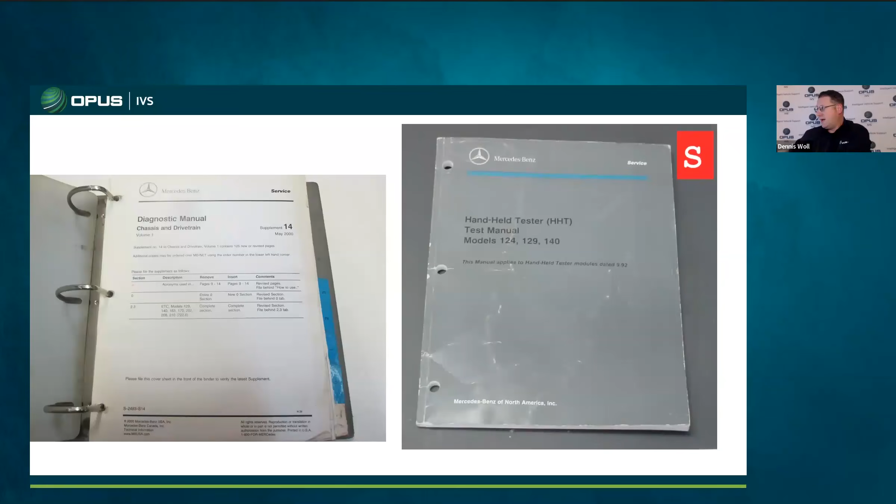When you're using that impulse counter, this is basically what you were going to reference. Having these diagnostic manuals was really, really invaluable. This is what they look like. They typically live with the oldest guy in the shop, but when you're working on this older stuff, it's really good to have. Having the book is going to have more than anything.

But if you don't have them and you can't get a hold of them, once you log on to Mercedes-Benz's ISP portal - and we'll get to that in a minute - you can go through diagnostic info and hit another tab that says launch manual. Here you can see we have a 124, 129, all these chassis numbers here. This was really invaluable to use with that impulse counter.

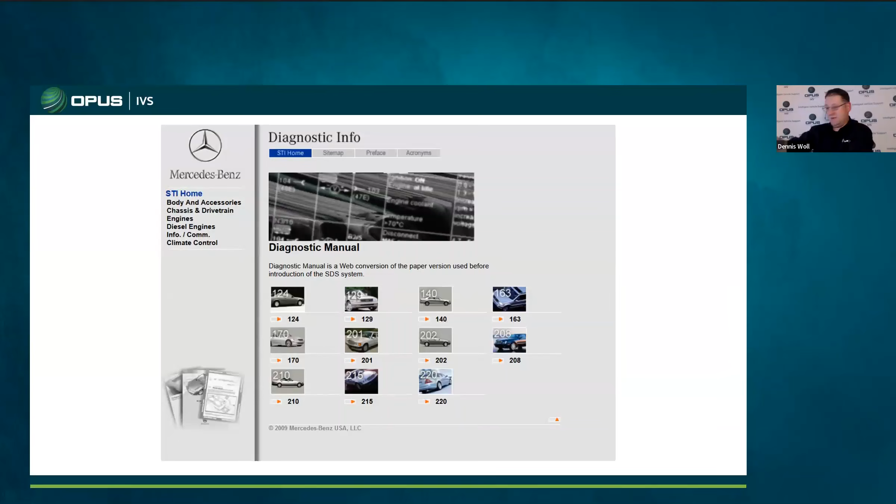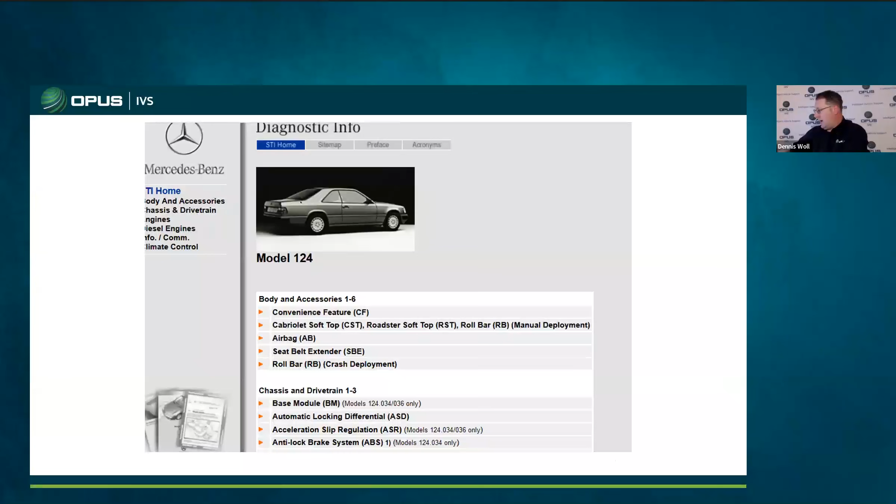So you would click on there, and either using the blink code, that impulse counter, or the handheld tester, HHT, you would be able to get here, choose the vehicle, and as we step through - in this case it looks like we're on a 124 here after we've selected our chassis - we can start to see these different groups show up.

Over here we see engine, for example. We have some basic testing and troubleshooting information. As we go through here, if you follow it down a little bit on the top left, it even tells you like engine control module, socket 8, EA/CC/ISC is socket 14. So it's telling you where those pins are that you can plug that guy into, to be able to use your impulse counter. If you're working on these older cars, it's invaluable information and it's pretty decent quality.

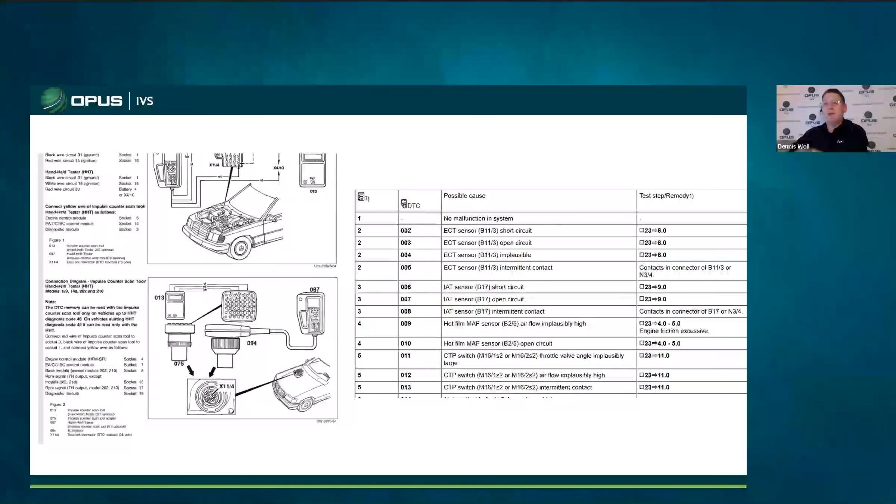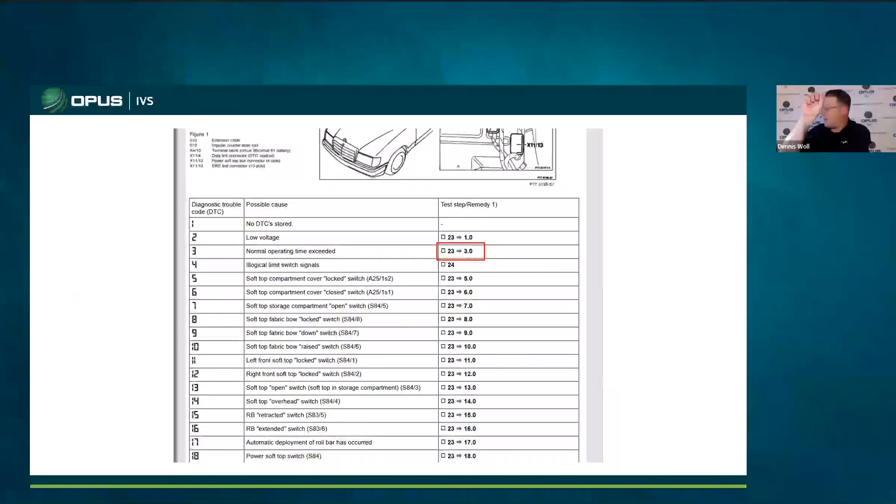The paper manual, the books, will always win, but it's way better than having nothing. Let's say we went over here and picked code number 3 on our diagnostic trouble code - it would take us to page 23, step 3. So you would click on that little 23 and the double line with the arrow, and it would take you to that 3.0 step. Here you can see in the top left corner you're on 3.0, and that's going to give us some results - erase your DTCs, check the wiring, possible control module, whatever the result may be - or go to the next step to get to the next fault test path.

So again, with the impulse counter, you need the paper manual or diagnostic manuals to be able to see what you got, because it's just a number. Now you're getting a fault description. So we're talking about cutting edge technology back in the day, right?

Andrew, on some of these older cars, how are those modules installed? Face down. Face down, gotta love it. So all the pins are on the bottom. I don't have socket boxes, so I'm going to start pulling it apart and back probing, and it's just an absolute mess when you get to some of these things. You can work ahead of it, but on some of these cars, depending on how involved you're getting - especially like a V12 where it's 3 separate harnesses.

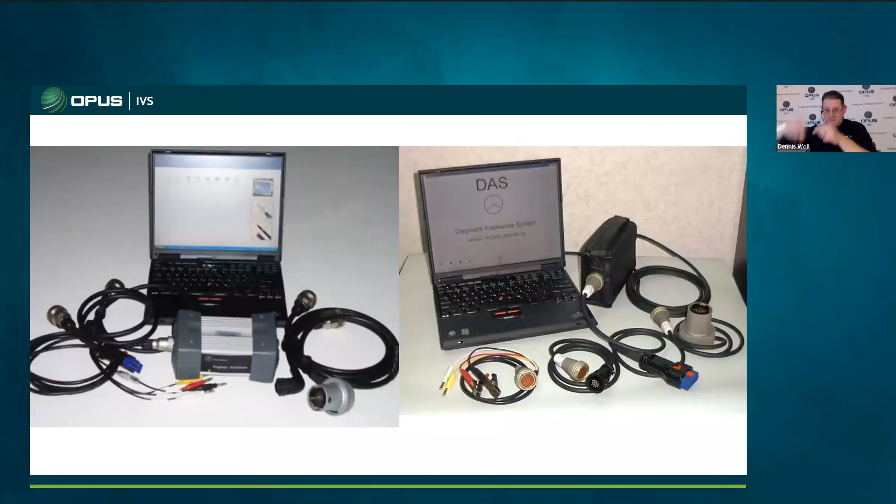So if you're looking, we've got just a small tool. We've got 38 pins, we've got just a little individual plugs. So Mercedes-Benz was pretty decent about being able to go ahead and go backwards. Now there's been various versions of the tool. And again, the multiplexer that we're looking at here, I mean, we're talking, it got bigger before it got smaller.

Andrew, where can I put this thing? I see it's got a strap on it. Can I just hang that on the side view mirror?

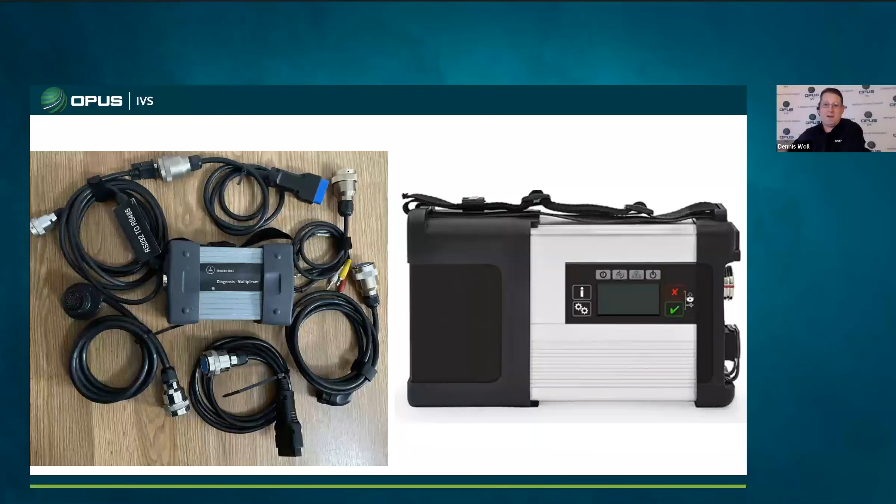Don't recommend it. So you could, but if somebody was backing out of the garage and they nicked it and the side view is a little loose, if that thing dropped, that ruins your day, because on these older ones, everything was in the multiplexer. So if it drops, you're up a creek without a paddle. I recommend just throw that guy on the seat or on the floor and just run the cable through.

If we're looking at our, again, this is part of that backwards capability that we're talking about. So this is using the SDS, and we're on an older car, and we're launching our HHT, or in this case, HHT for Win, right? Yeah. If we get in here, we look out in the center, that's how we're going to enter. And then again, we're going to look at that F1, F2 buttonology, and we'll get into that later on too, as we go through the presentation.

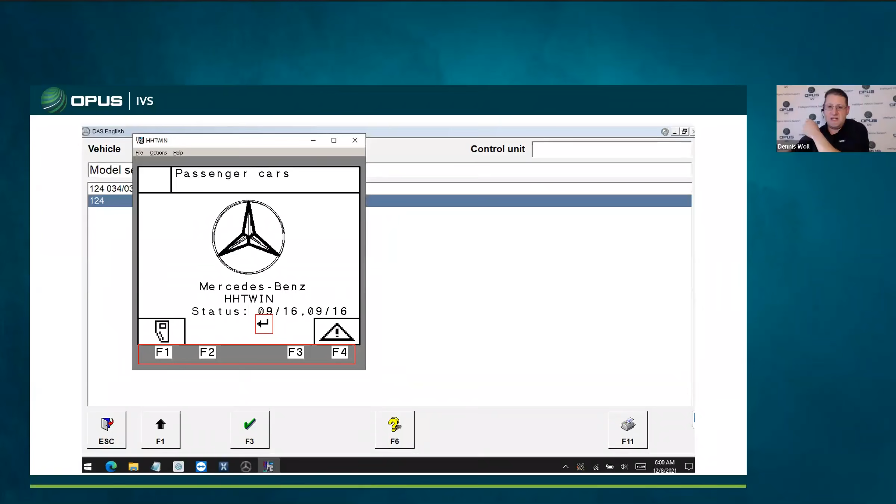Over here, here's an example of what a DAS screen looks like. Looks like we're on a 124 chassis. Quick test, they refer to it. Not exactly a quick test. Even with the factory tool, it can take some time.

So again, as you see that's highlighted in blue on the bottom of the page here in diagnostic info, that's what we talk to as far as our launch manual. Another thing that we see here is under our diagnostic info is OBD DTCs. So again, just another good source of information.

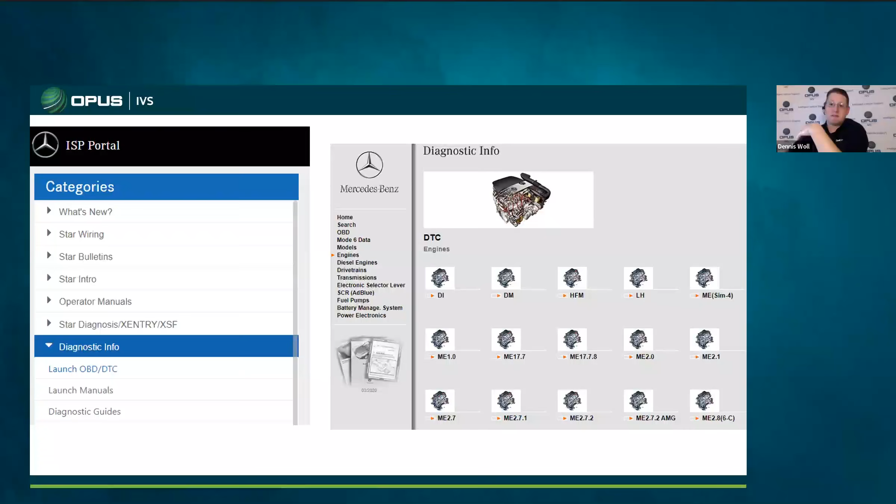If we go through here, again, this is using our diagnostic info under our ISP portal, or independent service provider portal. We'll get to that. As we go here to type in our code.

So if we're using our Impulse or HHT and we started wanting to go through and learn how to test it, right? Before that integration, you're so used to going through the manual or searching through on the computer. Once the ThinkPad came out and DAS was introduced, a lot of those tests were on the tool. But again, still a really good source of information.

If you look at the top right there, it looks like we're searching for a code 1200. You can also type in just a word search. So if you type in boost, a bunch of stuff with boost is going to come up.

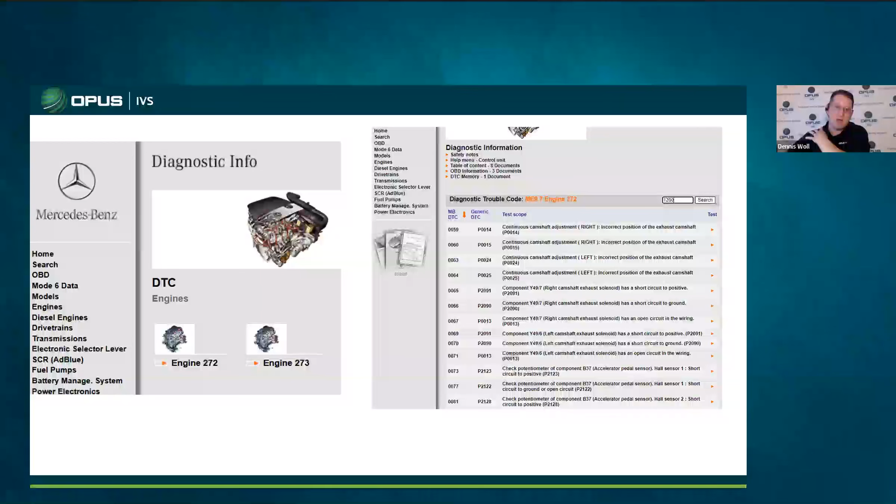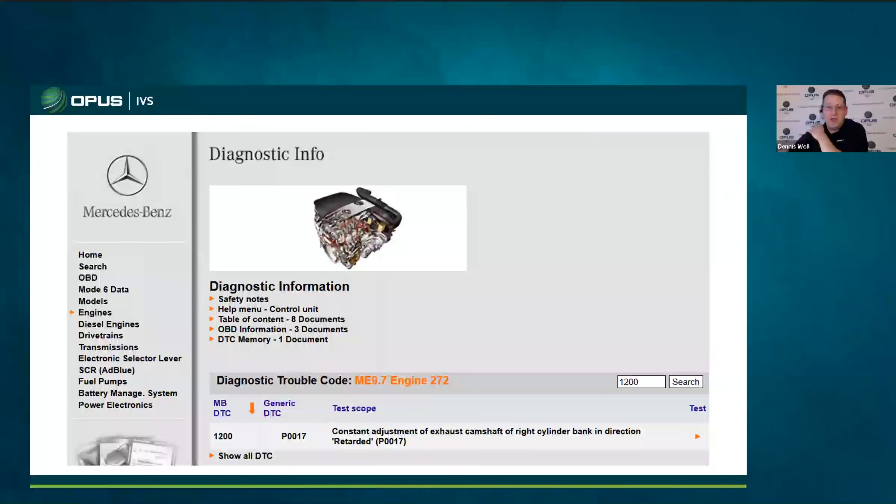Over here, it looks like we're on an ME9.7, or Motor Electronics 9.7. We're searching for that 1200 code. And it looks like we have our Mercedes-Benz diagnostic trouble code and the generic code. And now we have our description. If you click on it and keep clicking that orange arrow, it's going to go to the next step.

So most times you're going to have useful information here. It may even have some test steps for you. As time went on, this is what you saw.

Okay, so you'd get communication with the ECU, or electronic control unit, is required. So when it dead ends here, this is where Mercedes-Benz was really shifting a lot of their diagnostic advice into the tool. Okay, and even for emissions,

They've argued a long time that if you have our tool, you have the answer. I would say, for the most part, they're not wrong. It is a very comprehensive tool, and it does have a lot of good test steps in it and information as well.

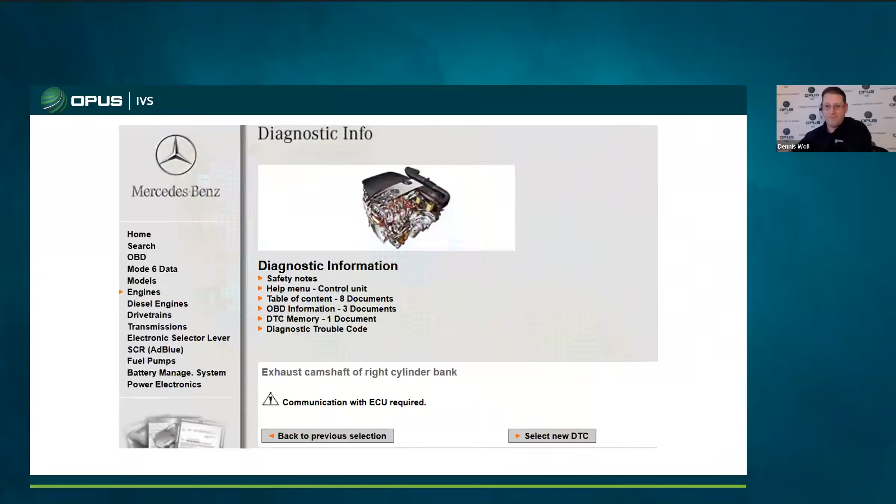When you get your tool, there will be a sticker on the box, and there's going to be a sticker on the back of the tool. Make sure that they match before you do anything with it. So once you get it, you want to make sure that everything's there. So if you do inquire a problem, everything matches up and you're not starting off way behind.

To be honest with you, I don't care where it is, whether it's in the multiplexer or in the tool, as long as it works. But this is typically what you're looking at. It seems to work pretty good. Don't have a lot of issues with it.

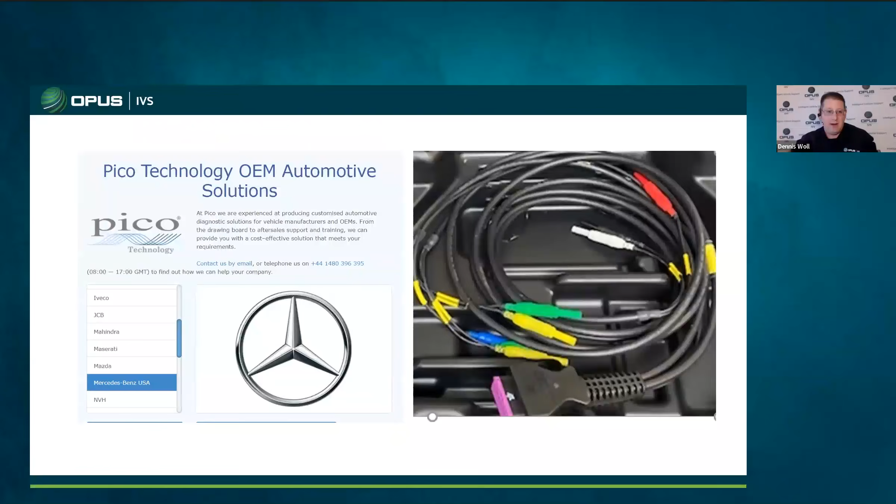So again, it's going to have your settings set up and ready to go. I typically find that they work, but always check them. Once in a while I do get a little thrown by whether it's got AC coupling on or not, and maybe it shouldn't. So always check that stuff if your pattern just doesn't look like it's supposed to.

There is also a pretty extensive library on there, and again, just very user friendly to use as far as using a scope.

We can't really get into the CAN tool for the whole day, but it's a great tool to use. Again, this is for when you have a good scope pattern. We're dealing with good CAN voltage, but we're more interested in the message. Again, it's highly advanced. If you ever have any downtime, it's a great tool.

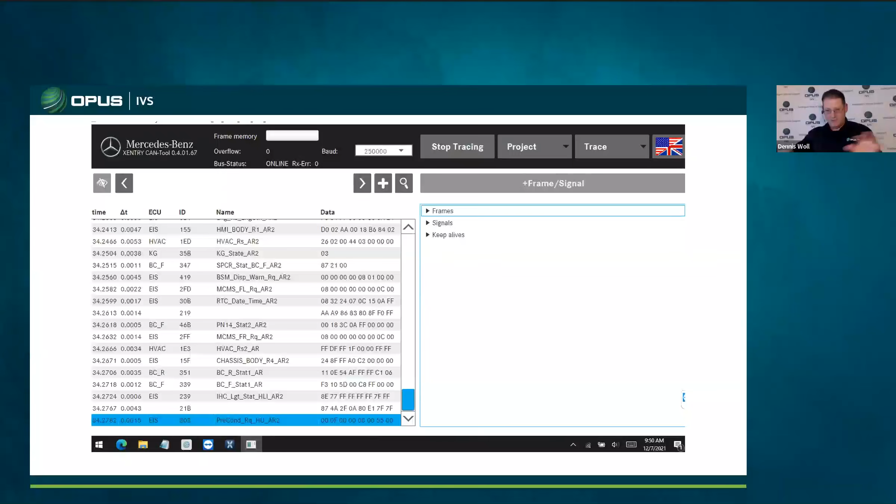Funny story - I was working on a car with my power supply on the jump post. I didn't know it, but somebody had messed around with the pre-fuse, and it basically blew and separated from the battery, though they kind of jumped it weird. My leads for my CAN tool were on the battery, which was stone dead. So it took me a little bit to find it. I thought I had good power and ground, turned out I didn't. So always go back to the basics when stuff doesn't work.

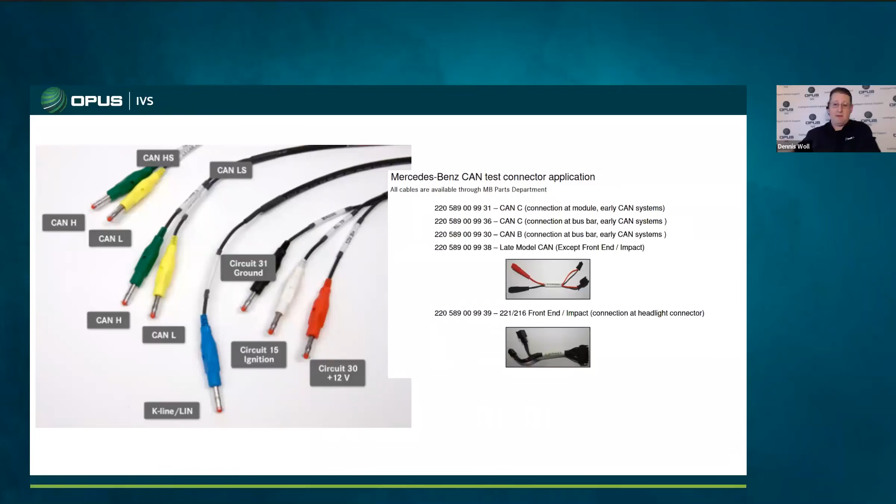Quick PSA here - if you have a cloned tool, or a knockoff, whatever you want to call it, make sure that when you order your $40,000 tool, you have your clone permanently air gapped. Because if I'm using my legit tool and I have my clone tool on the same network, guess which tool they're going to shut off? The $40,000 tool - now it's a brick. So if anybody's using clones or bringing them in, just make sure they are permanently air gapped. I don't want to play around with it. I hear horror stories about mobile guys getting to places with no idea there was a clone tool there, and it turns into quite a mess. So again, if there's a clone tool, leave it at home - you've got the real deal there, there's almost no need for it. And if it does need to be there, just make sure it's not hooked up to the internet. Xentry does phone home.

Now Xentry is important, and we're gonna get back to it in a little bit, but it's only one key part of a multi-pronged solution you need to perform these diagnostics. You need ISP and schematics and star wiring. Description and observation is going to be in WIS and our parts catalog.

So we're going to spend a little bit of time on our ISP, our independent service provider portal - that's going to be you, me, anybody who's not the dealer. When you get to log in, these are great resources for this multi-pronged approach. You're going to be given a C7 number from Mercedes-Benz. At the dealer, you were given a D7 number, so customer versus dealer. For me it would be C7D Woll or D7D Woll, and your password - make sure nobody else has got a hold of it.

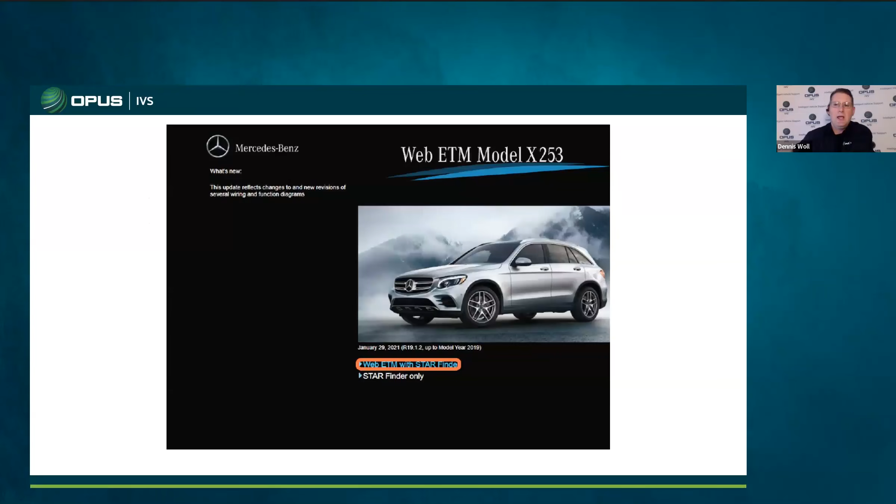If you just need locations only, you could do that, but you would hit Star Finder, below that highlighted orange there. But typically when you're using this, you want Star Finder with WebETM—that's what you'll be using.

A little box will come up. You might also see this when you're working on 48 volt or hybrid and things like that. You're just going to say that you've read it—hopefully you have—any safety information that is.

Once you've gone through there, you can choose to search by diagrams, by the title, by the components, by the name, or you can start searching through the number if you know the alphanumeric number. In this case, we're hitting N73 for our electronic ignition switch. Then just click on that document highlighted in orange, and it will take you to the schematic.

Right, so that's going to mean a few things. Typically, the most common is that you don't have access to it because it needs to be re-upped—it may require payment, or you may have a technical issue. Typically technical issues show you errors.

If it doesn't come up with that little pink error and it's just grayed out, you can go look at your subscription. I usually just take a screenshot of it and say, hey guys, I'm paid up, please turn this back on for me. I should say please, understand—as much as I'm saying I need it done yesterday, everything with Mercedes-Benz is hurry up and wait. So use sugar as much as you can when you're emailing these guys.

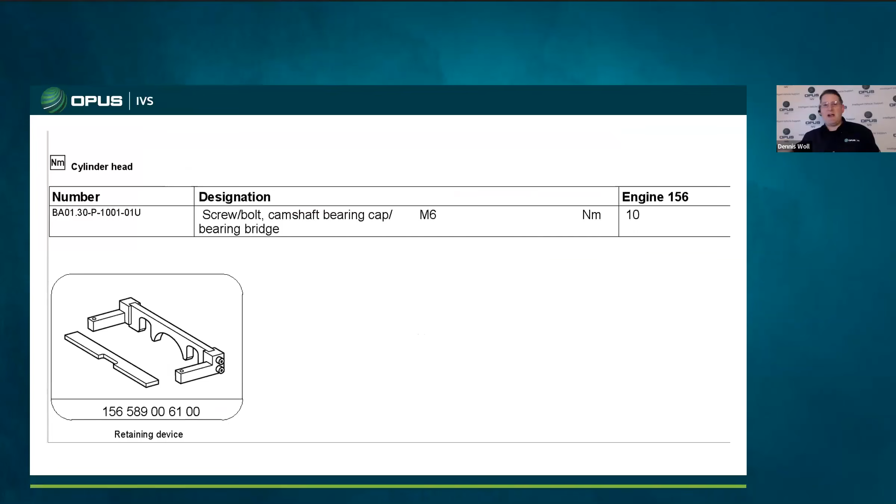And what do the blues do? Blues are generally specifications, fluid types, torque specs, that kind of thing. Special tools too. So in this case, we hit the blue and it's going to take us over here. So red's going to be your how-tos, blues are going to be all your specs and special tools and things of that nature.

I touched on the diagrams. Many other diagrams that are in your ISP portal under Star Wiring can be found in WIS. Mercedes-Benz states that the diagrams in WIS are more accurate, and I will say they are when available, usually with additional details too. These really work well on some of that older stuff, like a 903 chassis - definitely way more accurate than using Star Wiring. I definitely recommend using WIS for those older 903s.

If we're over here, you'd have to open up a document for the schematic - click on that PE document, then click the link to see it. So we're going to go ahead and click on our wiring diagram, go all the way to the right to our little eyeball and click it. After that, it's going to take us there. The first one on that top link, if we go over to our left, that's our wiring diagram for MESFI. If we click our guy on the right, it's going to take us right to the schematic.

Once you look at it over here, it's a little different than Star Wiring - you can drag it and move it, but it's not just going to be all over the screen like Star Wiring was. Fundamentally the same content or more. You can also change your color - the background color is in that top little 3 dots for the toolbar, and you can change the background color as well as show the flow of electricity. The other thing is that when you click on these, in this case if you click on a certain Z-splice, it takes you to that Z-splice and every Z-splice in the car - a nice little layout to see where things are in the vehicle.

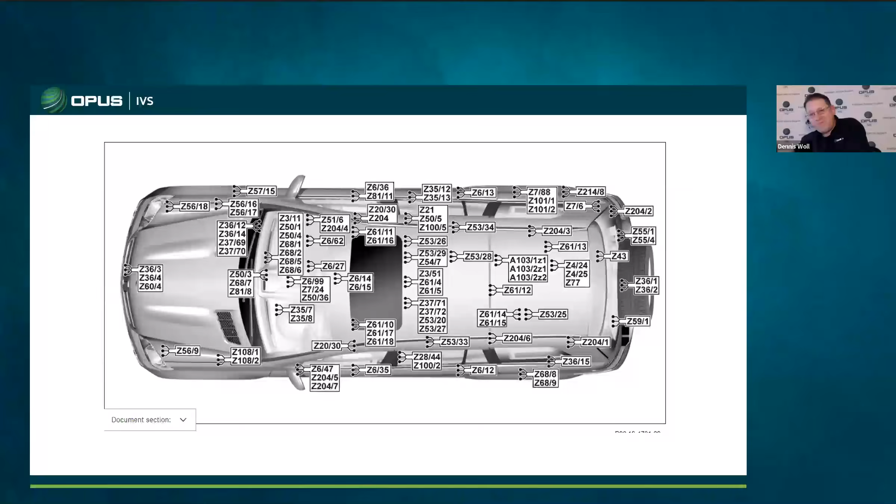You can choose the latest tips documents for what's there. You can get to the most popular tips documents, last read tips documents, and your favorites. Or again, we usually try to keep it as all to get as much as we can on that particular topic.

Now, the other cool thing is the same applies to WIS documents - you can just breeze over it, hover over it with the mouse, and it's going to move to give you a quick idea of what's there. Same thing with symptoms.

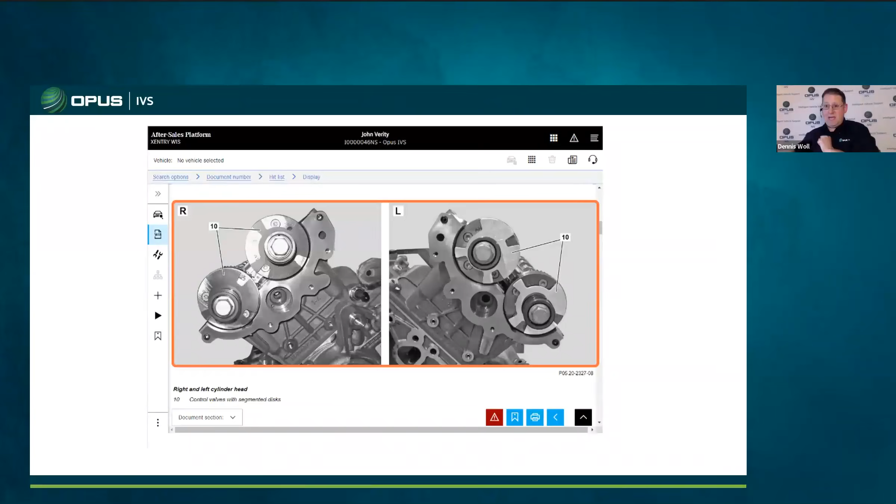You can also type it in the top left word search—you can put words in there, whatever you want.

Now that I've said all of that, if you're using tips, using the VIN is great because you're specifying it to your vehicle. Is that best practice, Andrew? Most of the time, most of the time—it'll be sufficient, but...

In some cases you might want to broaden your search by searching by the chassis only. If you search just by the chassis and the car you've got, Mercedes-Benz sometimes leave out information that is applicable to what you've got.

A good example would be oxygen sensors on an ME97—very common. I think the tips document or the LI topic says the lines are mixed; it's not that they're mixed, they're shorting out. And ME97 isn't just in one chassis—if you pull it up on a 164, you can search the topic and it's there, but if you search it on a C-Class, on a 204, it doesn't come up, even though it's the same engine and they suffer the same thing. So that's a way it'll kind of spill over to the next type of chassis.

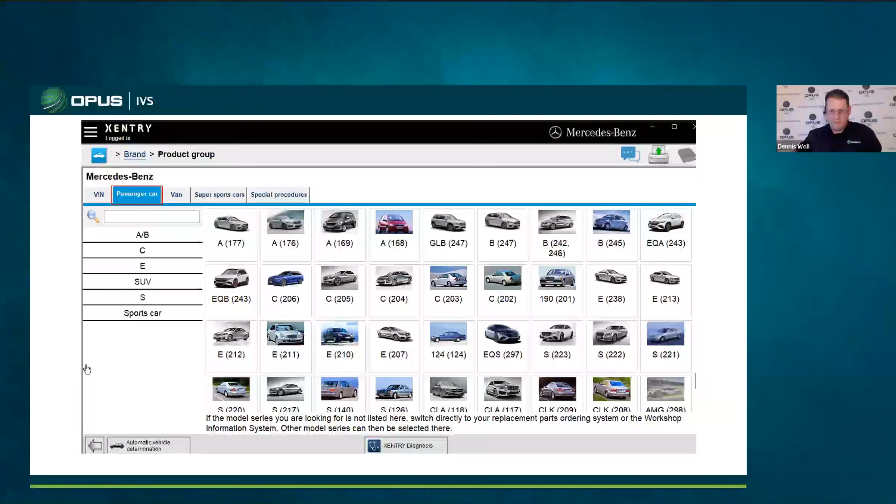So if the automatic detection is not there, passenger cars are good tools. This was a GLC I was working on. I selected all, kept hitting all, went ahead and on the bottom selected Xentry Diagnostics.

After that, it's going to go through a 6-step verification. That gray bar is going to play ping pong and go back and forth and run through all of our 6 steps.

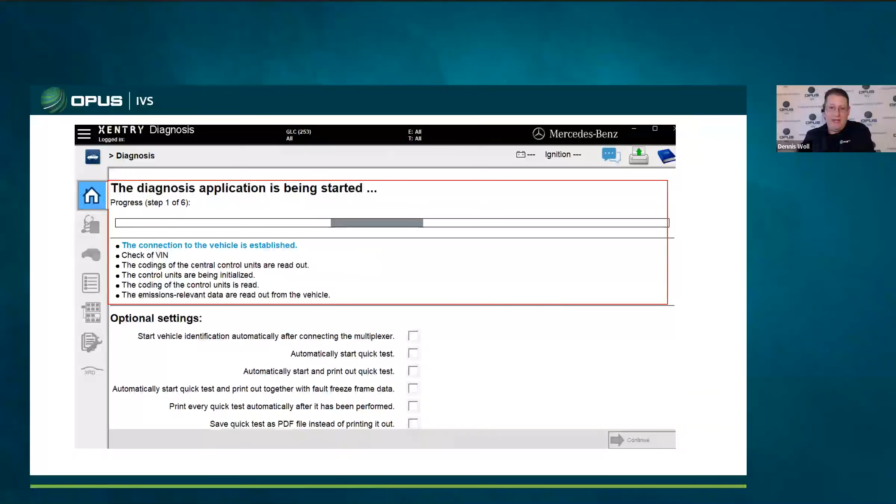If you hit customer complaints, it'll ask you to first run a quick test. We have overview, diagnosis, customer complaints, control unit view, topology, special functions, Xentry remote diagnosis - that's pretty much for dealers at this time.

We're going to start with a quick test and then work our way through. So we'll go ahead and hit quick test, initial quick test in this case, since we haven't hit one yet. After that, you'd hit start at the bottom left, and you're going to see a little progress bar come up again. Sometimes it's going to hang up - if this hangs up, just tap the screen and it'll start to go.

The control units are going to be in a fixed sequence, and they're usually in an order of function groups, right? Powertrain to body in alphabetical order. Now, the control units are going to be sorted into the status from current codes.

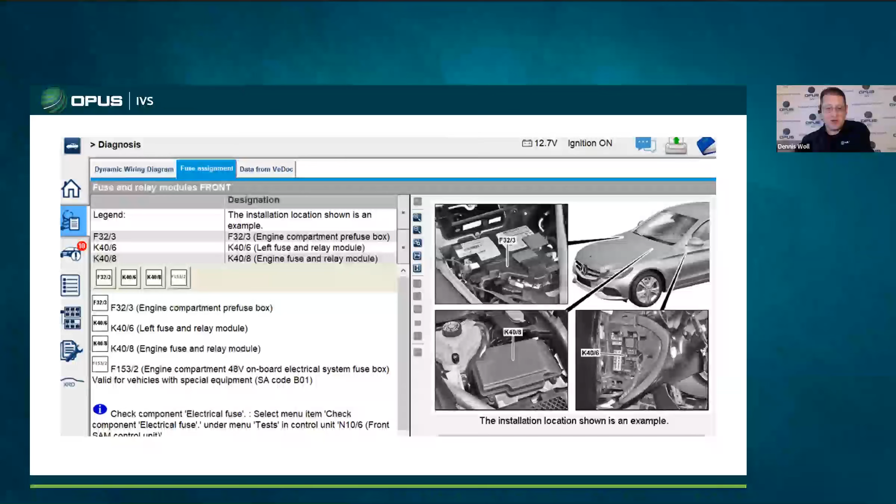And again, I'm right at the tool. I haven't left the car. And then here's my fuse and relay layout, which is also super nice because depending on data card and stuff like that, it may not be there.

I will also tell you this can be incorrect. If you look at it and let's say it's not making any sense, always refer back to WIS. WIS is always going to be more accurate. Okay, but again, it's nice to have something that's there.

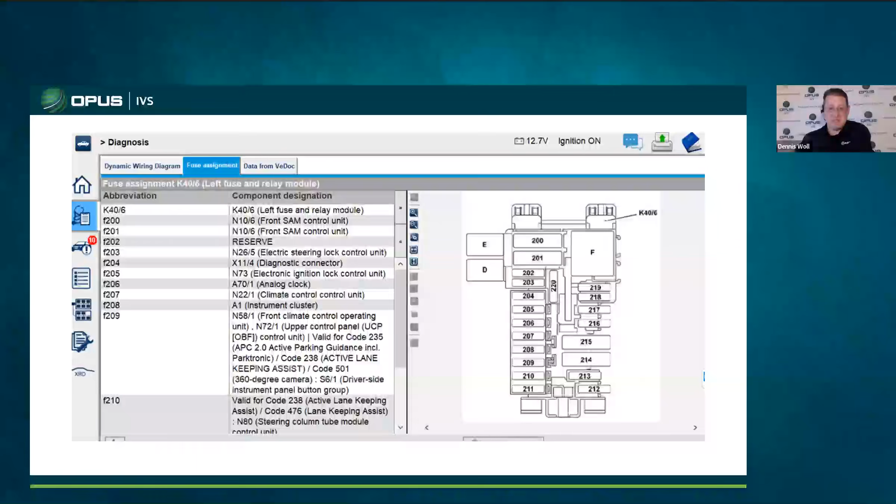We're basically just looking to make sure that it's not reading all zeros or bootloader, to indicate that the module is actually normal. And if it's in zeros or in boot, what does that indicate? It might be a new module that hasn't been programmed yet, or it could be a module where someone was trying to update it and the programming failed, and so it defaulted into the bootloader state. Or lastly, it could be that the module lost its programming just incidentally, which on rare occasions does happen. Again, just important information to know.

Next up we got actual values. You're going to see your live data there, nothing earth shattering. Next would be actuations. Usually this will give you notes as well as instructions, even prerequisites. It's almost like a prelude to a test, and they ask you for a current reading or give you a current reading or a voltage reading, things of that nature. So this is going to be your bi-directional controls.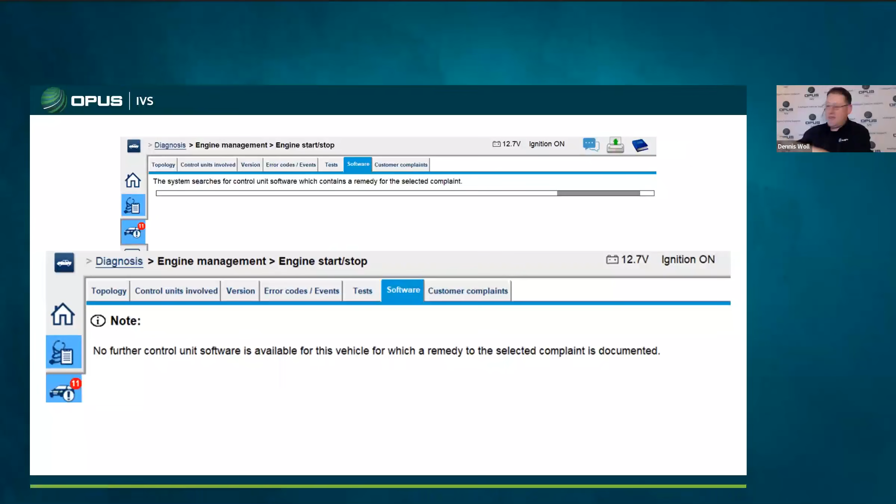Back to customer complaints, over here we can go to our control unit view. Control unit view is good if there's no module list and you want to go right into it, but it can be a little dicey. If you get into it, you better know what you're looking at and what it's equipped with, because if you don't, it can lead you down a path of 'it's not talking, it can't be determined.'

Now it's going to take you to a test, so just use caution. In this case, we looked at our all-wheel drive transfer case, and this car doesn't have one - it doesn't have a separate transfer case module. So just use caution when you're doing that.

The cross hatches in that area, what you see with the A26/17, N127, and M310, means that the control unit acts as an interface. The dark section means the control unit is in the bus system. There's an information window that pops up when you click on it. Our red markings represent any kind of fault in the system. You can also identify CAN and LIN, etc., as you go on.

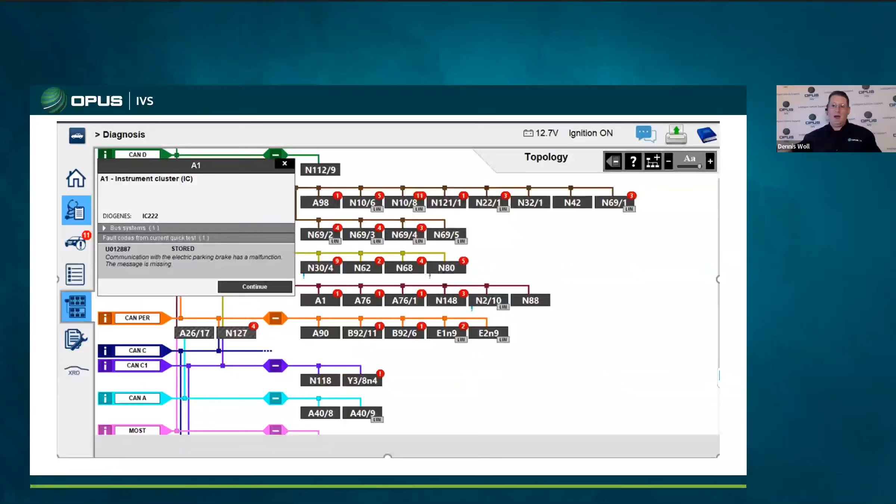You can hit continue here, and it's going to take you right to the module. In this case, it looks like we're on our transmission control module. And again, we're using topology here, and I'm going to go ahead and hit continue.

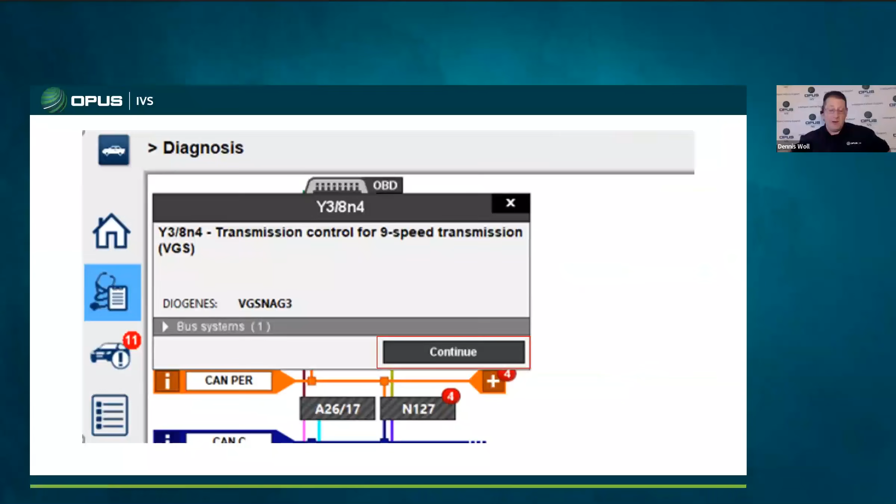Oh boy, Andrew, help. What am I looking at? What happened here? This is your typical screen that you'll see when you can't communicate to a module for some reason.

Okay, those three check marks are your friend. If you click on them, they'll give you some idea of what kind of testing you should do to determine the cause of the lack of communication.

So what I would say here is that if you see the yellow screen of death pop up, if you can toggle back and forth between the restart, just to the left of the check marks, and it's still there, it'll let you navigate back and forth. Usually means the part's not talking and the tool's okay.

If you're on the yellow screen of death and it just locks up and doesn't allow you to do anything, usually means it was a communication thing between the tool and the car, and just restarting it will get you back to it. So if I hit the three checks on it, that's going to give me some troubleshooting, right?

Yep. Okay, I'm hitting three checks. What are we looking at here? Basically the power and ground checking.

Okay, so it's taking me right to the test. Yeah, right to the test. So specifically, I've got power and ground.

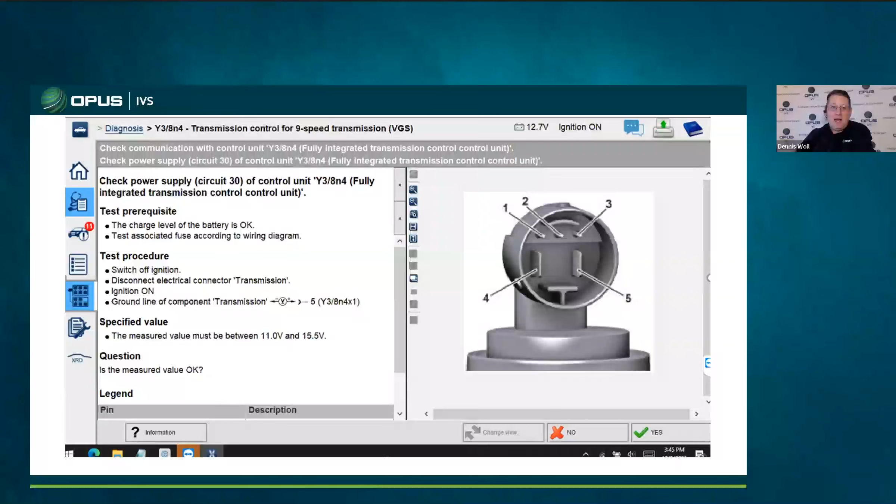Okay, so I can hit no or yes at the bottom there. It's even showing me what pins are what, which is kind of nice. It's laid out, right? Yep. Over here, if you see the screen behind this one at the bottom left, it's telling me pin 1, 2, 3, 4, 5 and what they represent. So that's great, there's a pin out.

And then we have a prerequisite that comes up. It's telling me about the prerequisite, make sure the power supply is okay, and it wants me to expose a CAN voltage distributor and make sure the wiring is good from A to B, right? Yep. So I'm going to go ahead and say everything's okay.

I'm going to hit yes. All right, I hit yes. What's it telling me to do? Chuck a control unit at it. Put it in, right? Can I put this in? No.

Why? It just, look, the tool said to put it in. The tool's got a blind spot or two, it's got a blind spot, that tool. Okay, here's the deal. It cost me $40,000, it said put the tool in, I'm going to spend $2 grand, I'm going to pop it in there, and I still can't talk to it.

Guys and girls, we still need to make sure that we're being technicians or mechanics or whatever you want to call it. Make sure it never mentions anything about terminal tension. So whether you're using the official Mercedes-Benz electrical test kit or whatever test kit you have, AES Wave makes a nice one, you want to make sure the terminal tension is good. Because if this car was at another shop and somebody was working with my first test light and jamming the thing into the pin, they widen it out and you're not going to know.

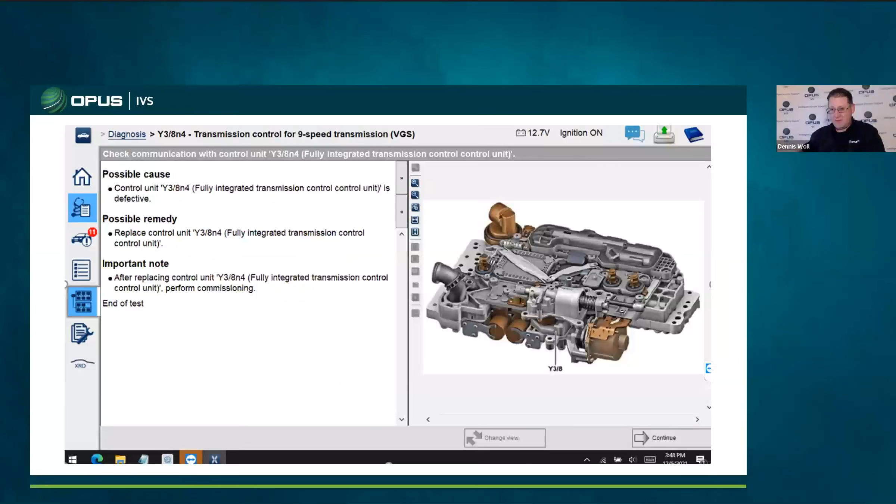And again, Mercedes-Benz in their directions, they're not mentioning it there, they just want all the lines to be okay, they don't specifically mention it. So make sure we have the right stuff. The days of paper clips are gone.

And I should mention back probing, though it's good here and there, I like wire piercers better, because if you're back probing, sometimes you can actually make the connection and you might be fixing what's there and still not be able to talk to it, okay?

Back over here, we have special functions. We can see any kind of stored logs, retrofits, Xentry remote diagnosis. All this stuff is XRD. This is all mostly for dealer, you're really not going to touch it there, okay?

If you're ever on the line with Mercedes-Benz and they tell you to hit hamburger, that's the button they mean, the three lines at the top left, okay? If you hit that and they want you to scroll through, I can tell you it will give you mostly what we've gone through, plus some more stuff.

So again, you'll have Xentry VDOC, you don't have access to that, but again, you can see TIPS and WIS and parts information right from there, and you can launch it right from the tool.

Again, just to reiterate, tips is great, but when you're using a tool, it's going to lock it into the VIN. So you might want to do that search as a general on your computer, and make sure it applies to your vehicle. Again, when using parts, make sure the VIN's in there.

Okay, over here we got our system settings coming up from our main menu.

XSF is basically there if you have a problem with the tool, it will prompt you to log in. Always accept cookies all the time. It may have you fill out a support request first.

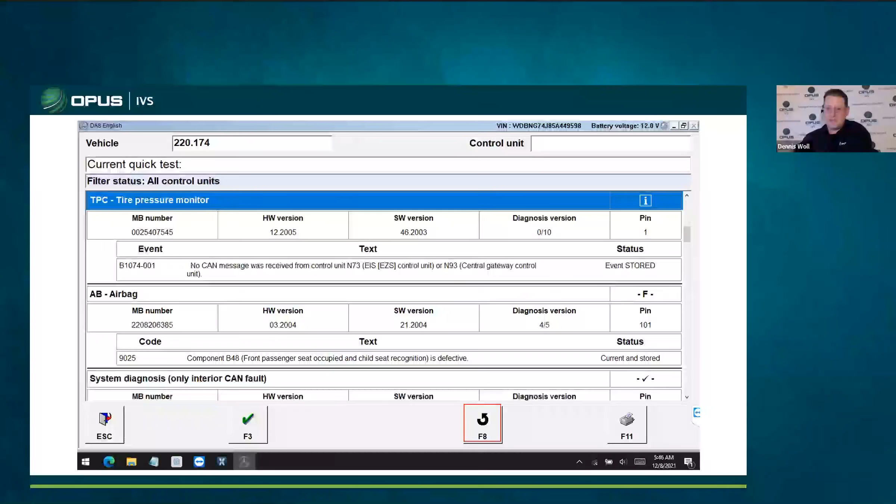You can launch WIS right from here. Again, F8 is going to be your exploded view - this was the plus and minus that you saw on the Xentry screen. And then F9, as I spoke earlier, was for clearing codes. F11, obviously a little printer there, it's going to go ahead and print it.

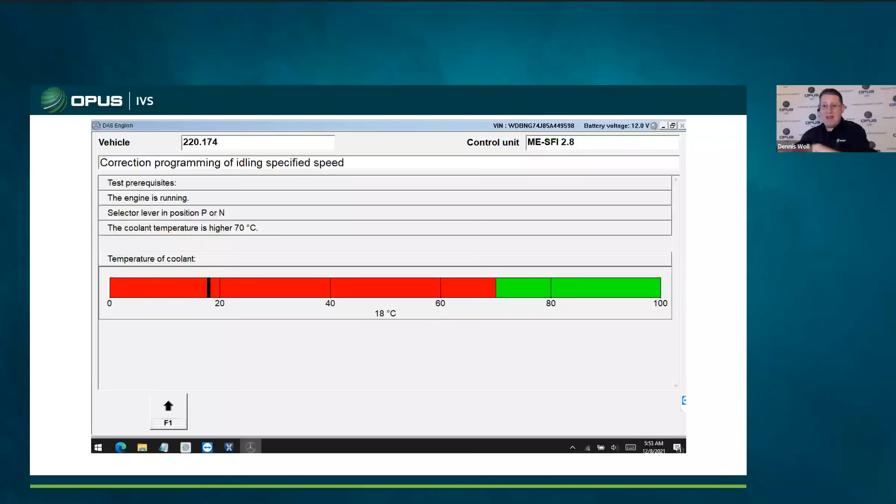In those DAS cars, and some of these Xentry, and definitely some of the older DAS cars, you could play around - there's been adaptations. If you went into variant coding, where SCN coding was starting to happen, you can actually do some stuff here. If you have an enthusiast driving a car, you can jump up the timing, enrich the mixture. If you have an older car with brand new engine mounts, brand new transmission mount, brand new seats, and it still feels like it's got some resonance, you can also raise the idle in park as well as in gear just to get that out. Again, this only helps if the car doesn't actually have a problem, but there is some stuff that you can do.

So we can go ahead and click on it and try to attempt to communicate to it. I've read all the information, hit continue, and yellow screen of death. So I can try to hit the repeat button, or I can hit my three checks. What do you want to hit, Andrew? Let's hit the three checks. Like it. So once you've done that, remembering this is a multi-pronged approach, you can have your WIS open, you can access the diagram.

You know the alphanumeric number representation of the driver's ESA is the N32/1 because you were just looking at it on your Xentry screen. You can go to the top right and start looking at the diagram to get an idea what's up. If you want, before testing, you can hit yes or no on the bottom right to get an idea of the circuit.

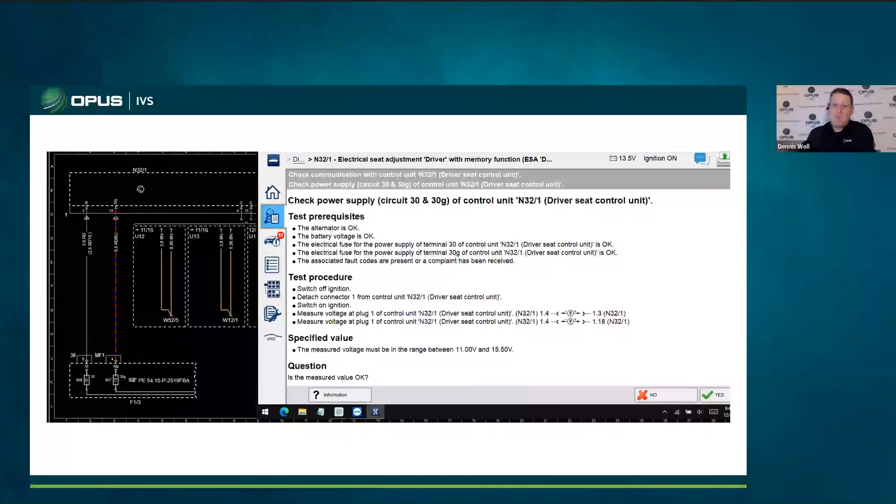Let's just say it's good. What would be next? Let's say no. What does it want next? What does it want from us, right?

So over here it looks like communicate with the CAN bus, has a malfunction, power supply, switch this off and disconnect this over here at the actual unit. And then it wants me to go to the right side of that interior CAN. So this is the left seat, but it wants me to go to the right side.

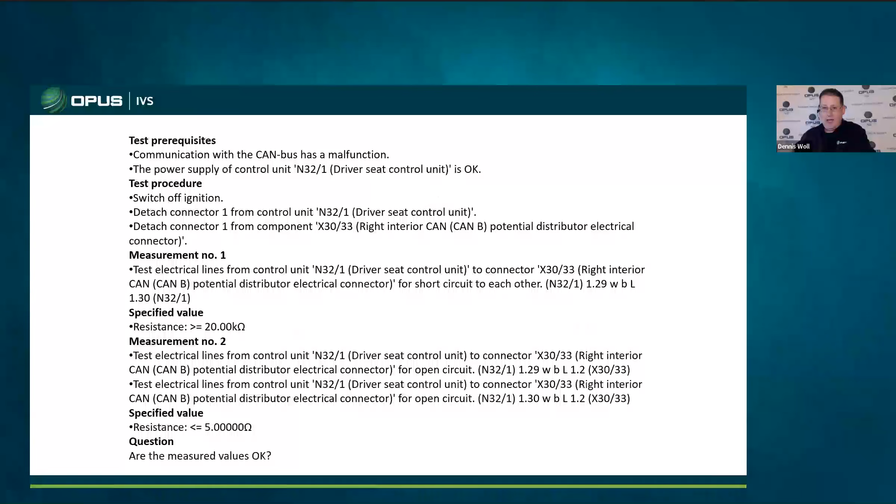All right, fine. But I ran a quick test on this thing, so I want to know what else is not talking. Let's take a look. So it looks like what else isn't talking?

Transmission and keyless go. Keyless go is not talking too. Okay, let's take a look. Is there anything that's related to them, right?

So if I work through the diagram, it's basically telling me over here the measured values are not okay, and it wants me to check a short circuit or opening CAN lines. So it's looking like I got a CAN problem, right?

So if I go to X30/33, I can see that my N69/5 is there. N69/5 is our keyless go. That was one of the guys not talking, right? Yep. Right. So if I go to my X30/33, I've unearthed that.

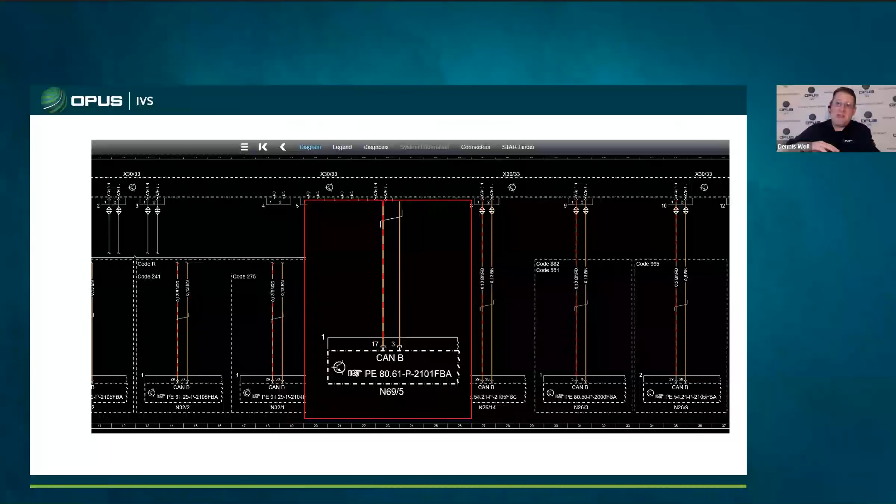I look at it, it's perfect. Everybody looks happy, my CAN voltage is good. But if I look at my X30/33 and I see what it has in common with my ESA, that goes over to the left side of the car.

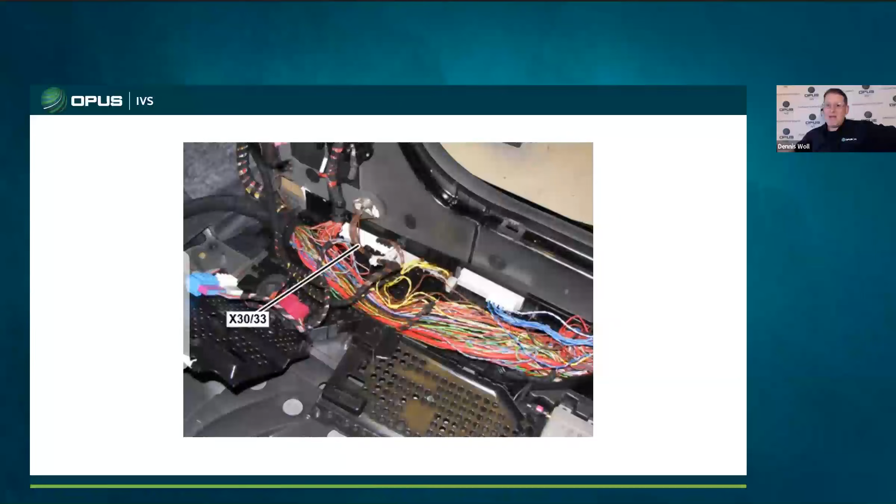And I can see it in my diagram. So I have my X30/33 and it goes to the X30/32. Okay, now it's starting to make sense. If I go to my X30/32, we had a bad connection.

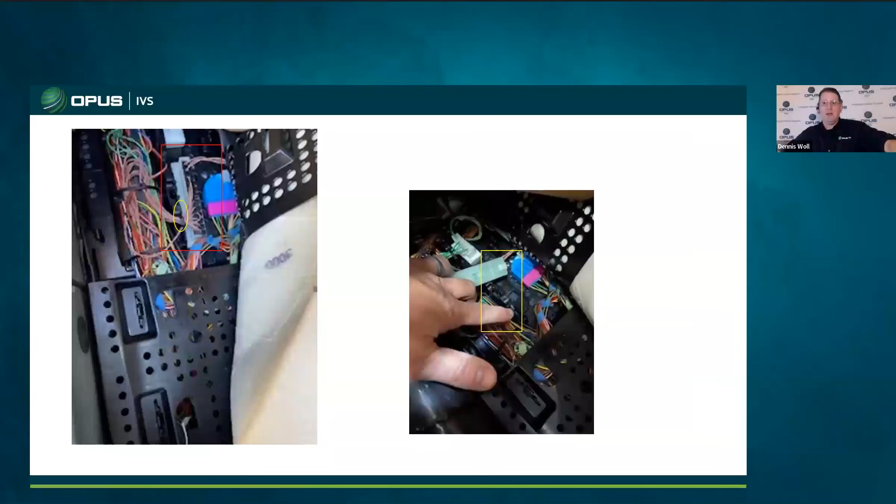That hoop that kind of corrals the wiring is so tight on this thing, it pulled the wire out of the terminal. So we went ahead and re-pinned it, put it back in, and bam, the ESA is no longer unresponsive or non-responsive, and keyless go has now come back. And those codes are now just stored codes. We're no longer in a non-responsive condition.

Programming with Xentry. When you're programming this stuff, it's pretty much going to walk you through it, guys.

I think we're getting short. Brandon, Dwayne, how are we doing on time? I'm not paying attention, are we doing okay? Someone answer me, they're not answering. We're going to keep going. So we're going to go. What do you got, Andrew? What are we at? We're just a little bit over 10 past. Okay, we're going to keep going.

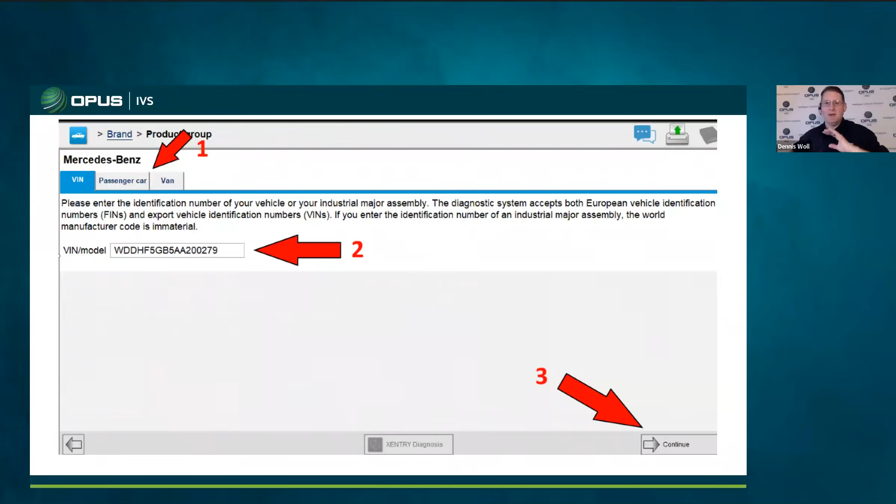We're going to step through programming here. Again, all you're really doing is selecting the car, the VIN that you're on, Xentry Diagnostics, you're selecting the car. We saw our two-step verification earlier.

And as we step through, we've read this and do this, we're going to choose what we're doing. So in this case, it's the transmission, right? So we're bringing that into service under initial startup. We want to make sure that it's correct.

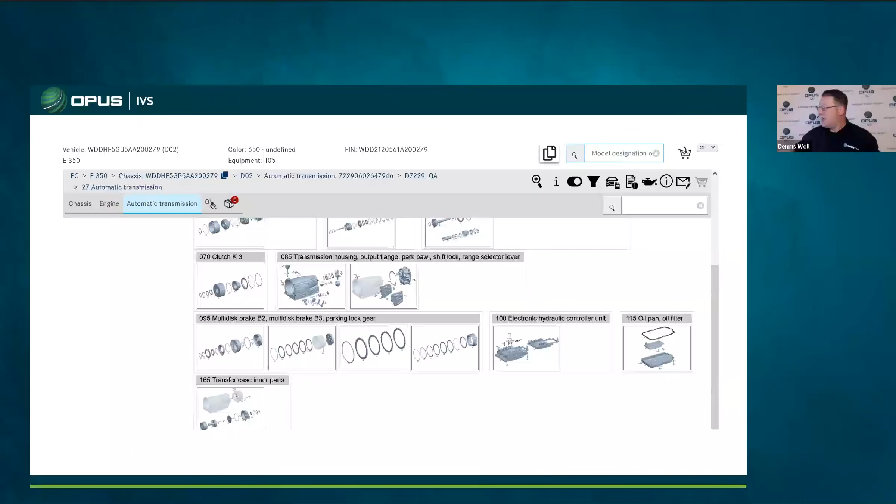Again, using that multi-pronged solution, we're going to have our parts information up, and we're going to put in our VIN, go to automatic transmission, and make sure that it's the right part. Make sure that what we've got is correct. Because again, parts guys are super important to what we do. And if you've got something that's new or just not with it, you want to make sure that what you've got belongs in your vehicle.

Okay, yep, so if we keep on stepping through, we want to continue with it. Yes, that's our number. It's going to make sure that we're logged in. It's going to be happy if you are. If not, it may also give you that two-step verification right here.

As we continue, we're going to keep on connecting. It will tell you, again, make sure you have a battery maintainer connected. Everything else is turned off. It's going to tell you the object number, and it's also going to tell you how much time it's going to take. In this case, if you're doing like a powertrain control unit and it was telling you I had to do this, this, this, and this, it's going to give you all that time.

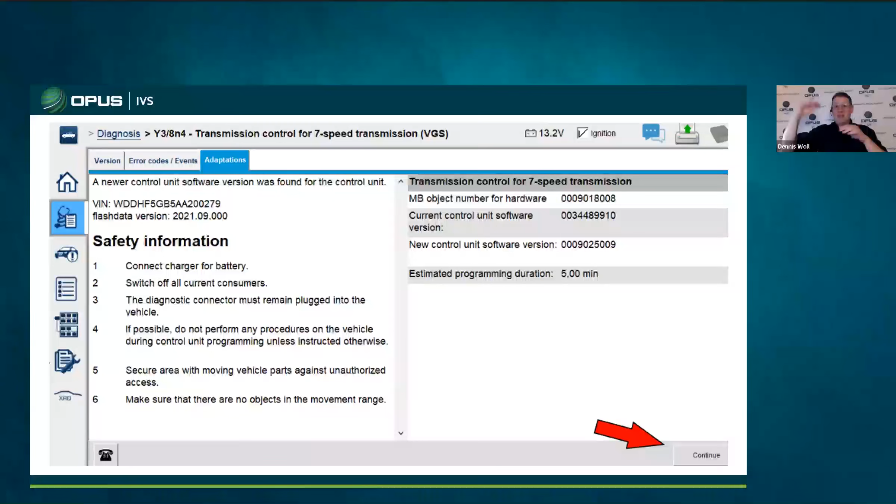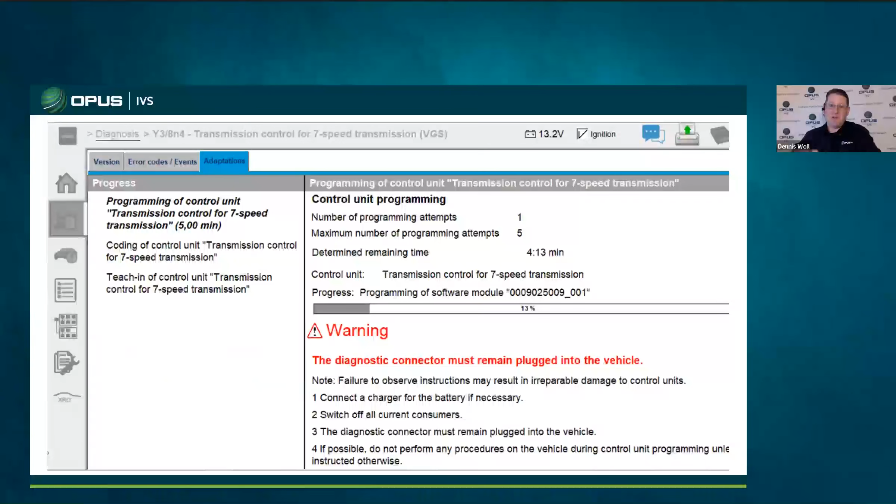So you can add it up, and it's also going to add that up for you to give you that time estimation. You do have up to 5 times to program most modules. If it doesn't flash the first time, don't panic. Just let it go and do its thing.

It will always program before it codes, and after it programs, it pulls the correct file. It will then code, and then it's any kind of teaching that you need. In this case, it's going to have you run through the gears, make sure everybody's, make sure you personalize it and activate it first.

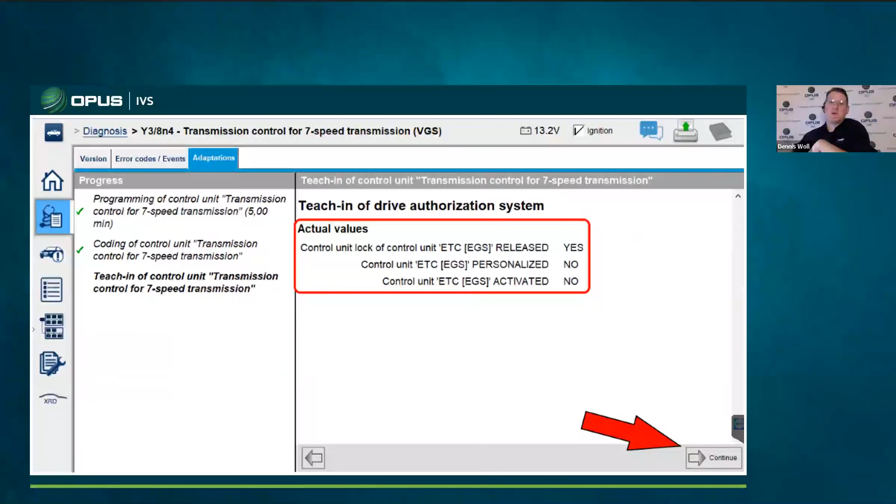Or learn it to drive authorization. Make sure your VINs, always write the VIN that's on the car, make sure it's in capitals, not lowercase letters. Always the VIN, not the FIN, and it's in capital. VINs are one-time writes. Over here, again, we're just stepping through the process.

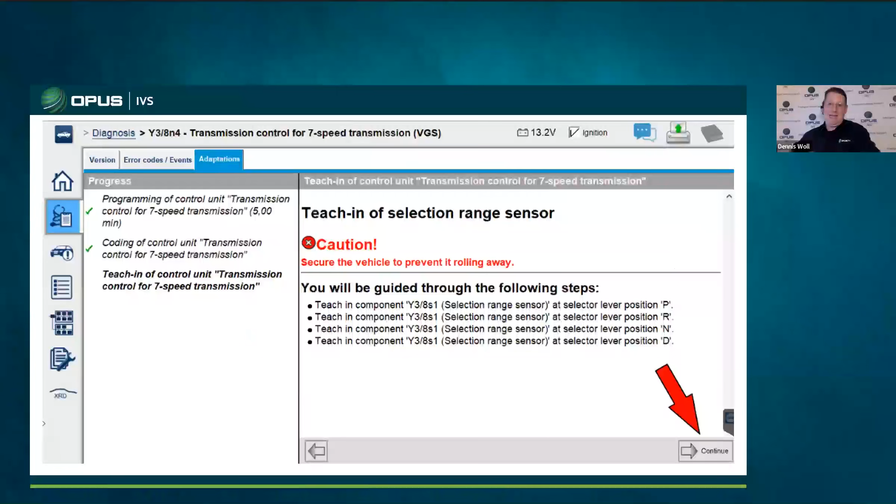It's going to be write the VIN, next. Learn it to drive authorization, teach it in, whether it's the throttle stop, in this case, the selection range sensor, and it's going to tell you what it wants, hold down the brakes, and follow the instructions on the screen. After you're done, it will tell you whether it's done, yes or no.

Over here, you're going to see, again, you'll fill that out. You can print it. The program is going to show you a little check that it's done, the coding, a little check that it's done, and you're pretty much finished here.

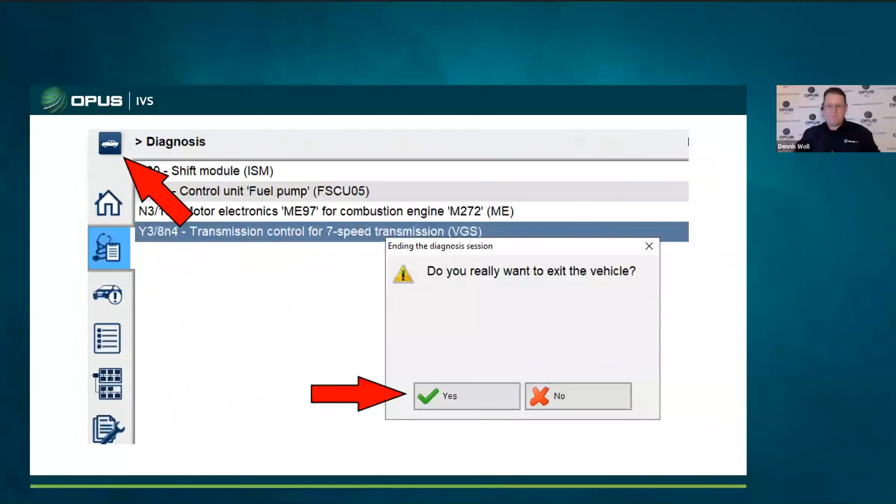At that point, let's go through some quick case studies. In this case, active brake assist.

So active brake assist, when you're bringing that into service, there's always a question on whether or not you're going to need the tool for it. If you're bringing this into service under initial startup, it will tell you whether or not the tool needs to be brought with it.

If we look in this, sorry, okay, so we're bringing it into service. Excuse me, we're bringing this into service. In this case, this active brake assist.

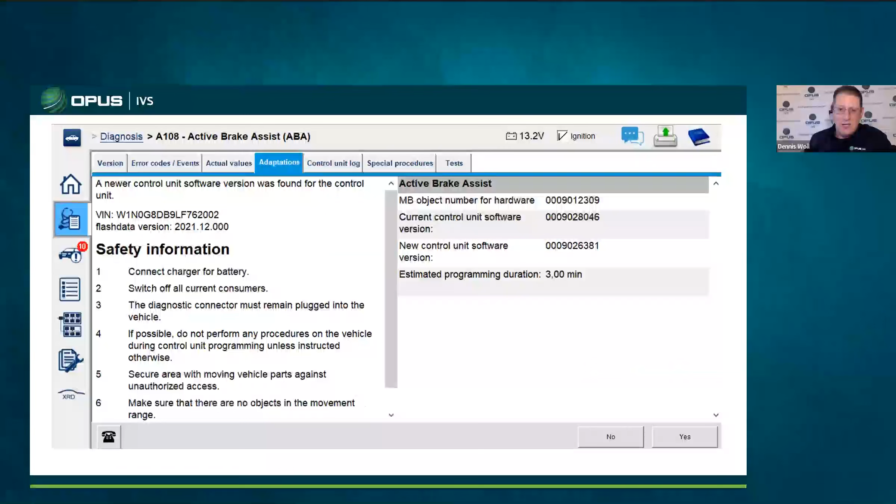Again, it tells us it's going to take 3 minutes to do. We're going to go ahead and check all of our prerequisites, make sure everything's ready to rock. 3 minutes. Our progress bar is going to fill up. That's going to say programming's been done, coding's been done. Good idea to print this page out.

Now, during the calibration drive, the diagnostic unit must be taken along in the vehicle for determining the calibration progress. For your lower lines, the tool usually needs to be driven with you. For your higher lines, it usually tells you right then and there it's not necessary, and the car will tell you either in the cluster or in the COMAND.

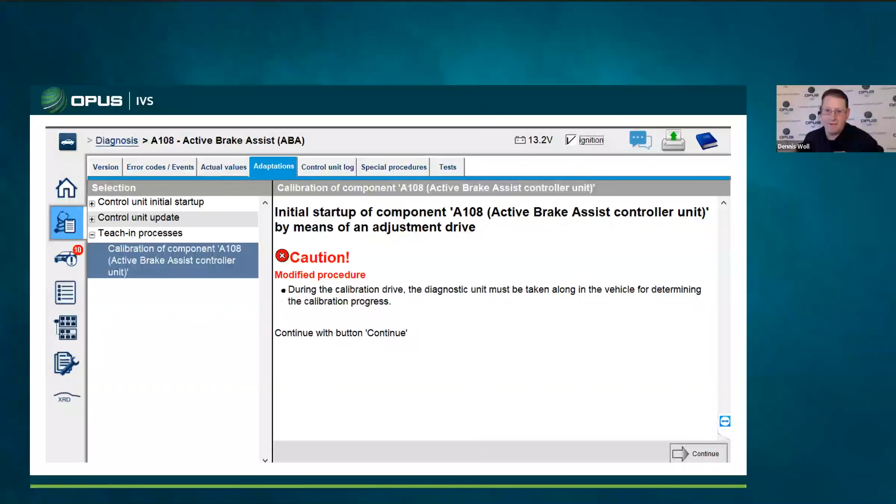Something else I want to show you guys. We're gonna zip ahead here because I know everybody wants to be done.

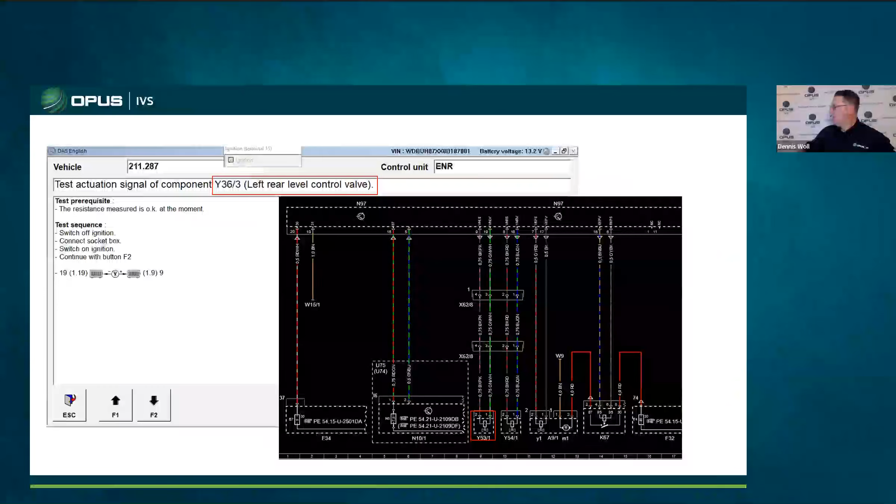If Xentry ever hangs up, minimize it and hit diagnose to stop. That's what that's for. If it's just hanging up and not responding to your button taps, it's also a good idea to drag and drop and minimize it to the bottom of your toolbar if need be.

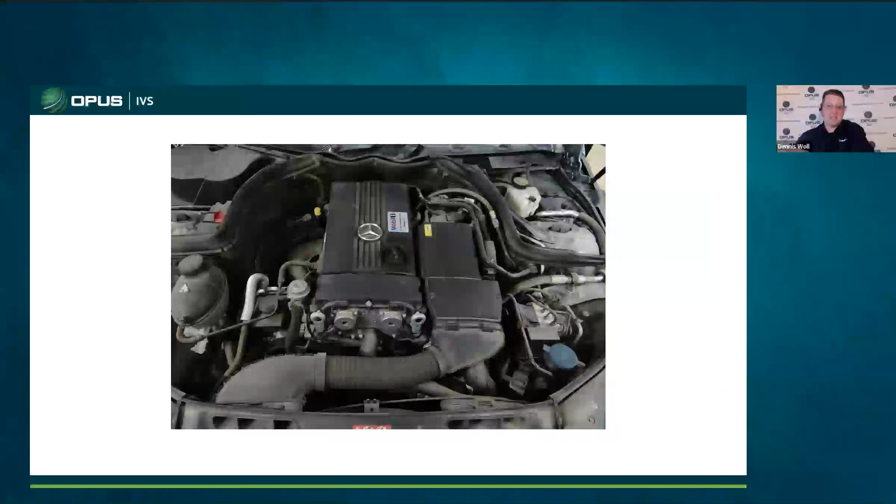Another thing I want to show. So this was a 203 chassis C-Class with a 271 engine in it. Now the ME, the engine control module, motor electronics, is just running the fan full tilt. The guy was there, he said, my tech looked at it and tested all the wiring, it needs a new engine control module. So they put a brand new engine control module in.

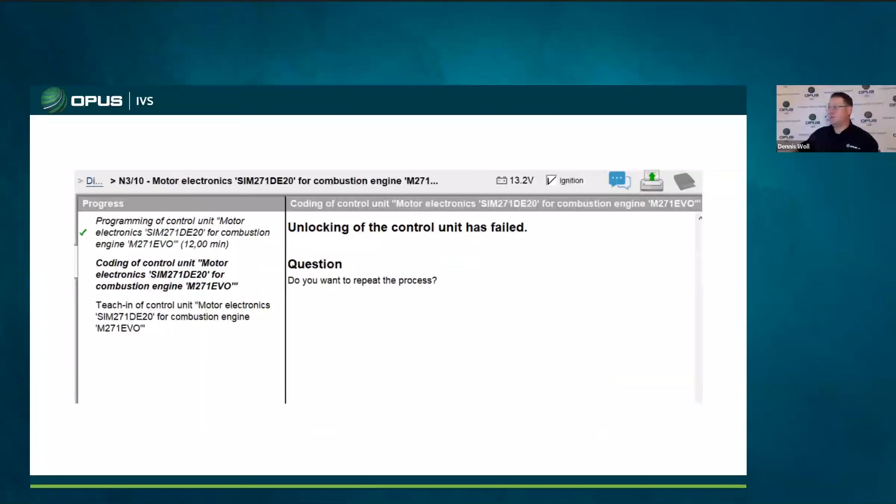So if we look over here, this is what we're looking at. We're trying to bring it into service. We've hit adaptations and it's a startup. Bam, no new control unit software has been found. Great, I don't even have to flash it. All I gotta do is SCN code it and it's done. I'm gonna be out of here real quick. And then we get the yellow screen of death.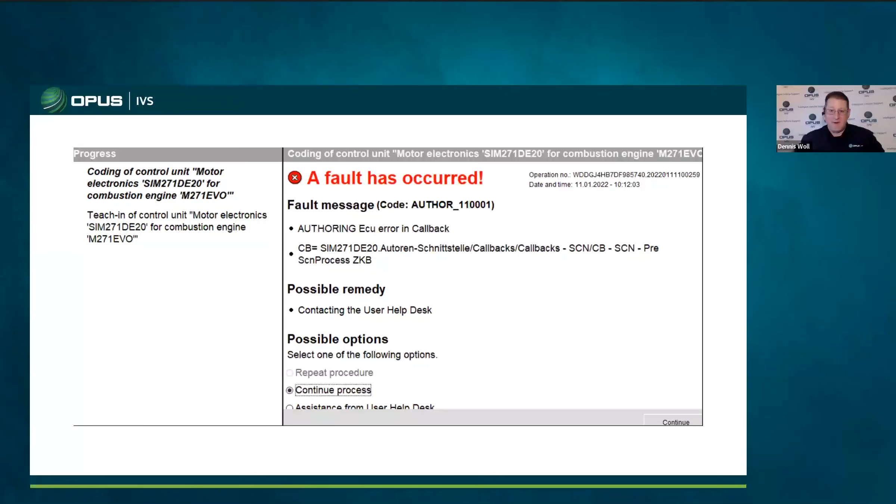This should be a slam dunk, right? Everything's been tested, this should go right through. But we had an error when we were trying to teach it in. So we go back through it and want to redo it again. We hit repeat next to the 3 little checks, and again we see a fault has occurred. We've got some weird nonsense on the screen.

I try it again. I'm losing an object number, I can't read from the ME. I've got random readings, I'm dropping communication. None of this was happening before. Go back to the basics when stuff like that is happening. Again, a multi-pronged approach. Go back to our diagram and take a look at it.

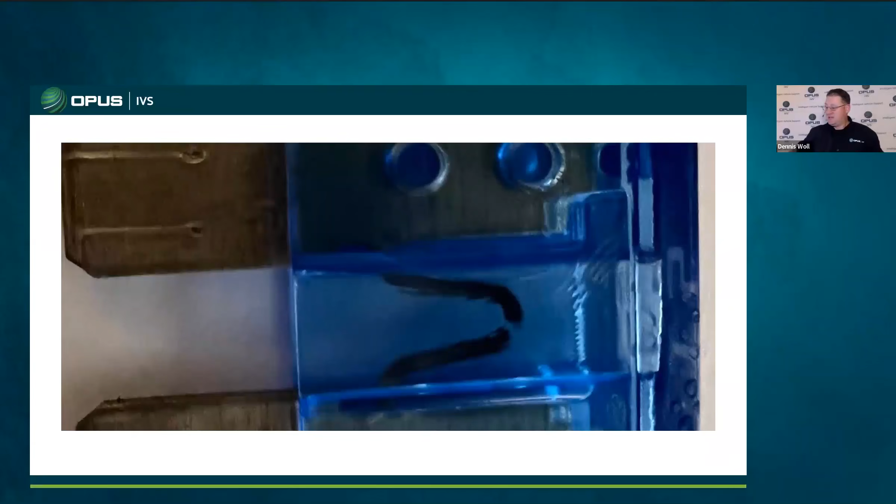Recheck the basics. In this case, fuse 25 was cracked. This is really zoomed in, guys. He was measuring it, going through some of the fuses here, with a maintainer hooked up. It's at 13 and 13 and 13 and 13 and 13 and 11. Whoa, hold on, we're missing something. So we went over to it and pulled on the fuse, and it was blown. That's all it was.

Once you put it back in, everything went through, all the coding went through, and it was taught in within minutes. So if you're ever coding or programming something and it's not looking good and you're getting weird stuff, always just go back to the basic stuff.

The other thing I would tell you is headlights can be a pain in the butt, and you may have to do them more than once to bring them into service with the factory tool. I don't know if other tools are like that as well. Some are. It's not uncommon for you to have to redo SCN coding and then teach in the light.

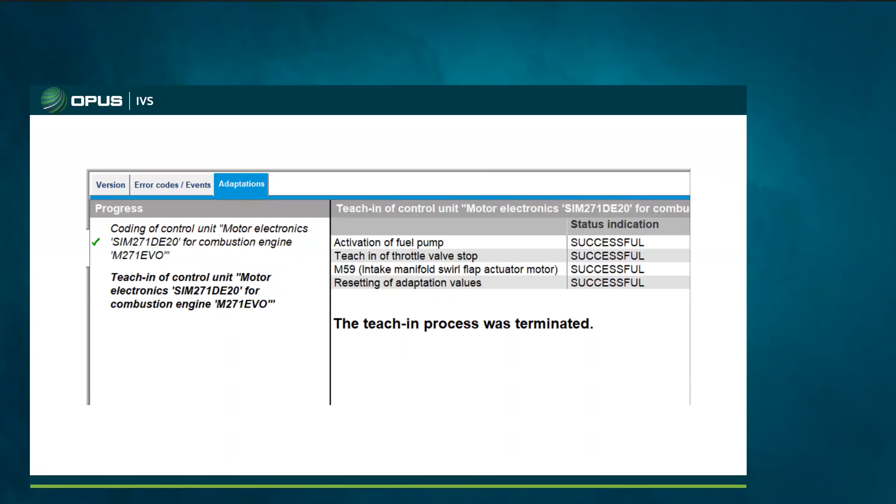Oh, okay. Where do you buy the unit? Where you would buy the unit is you have to go to your ISP portal, and on the top of your ISP portal, you will see something where you want to purchase software or hardware. And after that, you would follow the prompt for what you want to purchase.

Have another question over here. Have you guys had issues with the Cardaq 3 Plus utilizing J2534 setup with newer vehicles? As far as setup, no. I will tell you your access is going to be greatly different than the real deal. You may not get actual values, actuations. It's usually strictly for just bringing stuff into service.

I see Beaker in the house. Yes, I am in the house.

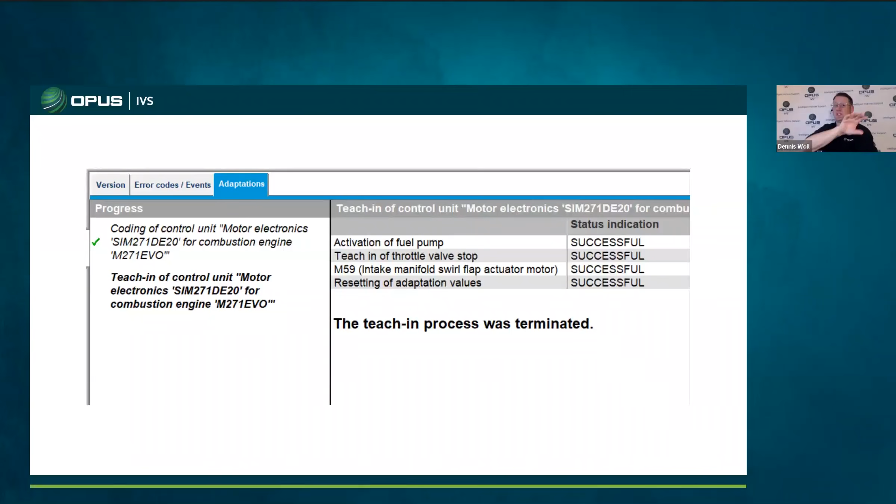Most ADAS stuff is done just with the tool, but certain things you will need a target for. Very early backup cameras, night vision, things like that, and sprinters, some of those guys will need a target. When a target is needed, it will tell you please use such a tool, and it will use it there.

Actually, while we're on that subject, let me tell you this. If you're wanting to know about what's needed for some ADAS stuff, you can go into even the simulation and look this up, and it will give you measurements or a part number of a device that's needed. Going through the workshop information system is invaluable, but sometimes stuff is buried in there, so it's easier to just go in and use your simulation if the car's not there. As long as you've got a VIN, or you can pop it in and work forward, or know about what the vehicle model is, you can get yourself through it and save some time.

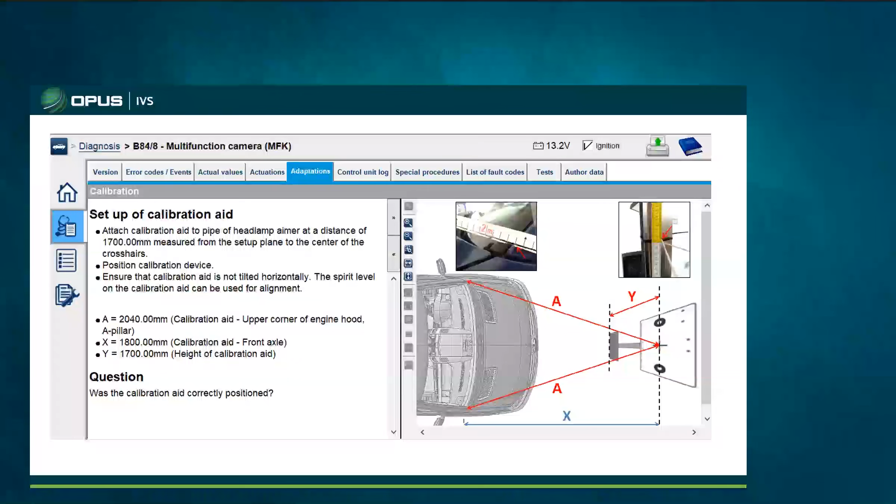All right, Matt Batista, I'm asking you a question here. I'm sending it to you, hopefully you can see it. It says issues with Xentry talking to an EIS. I need you to elaborate a little more when you can.

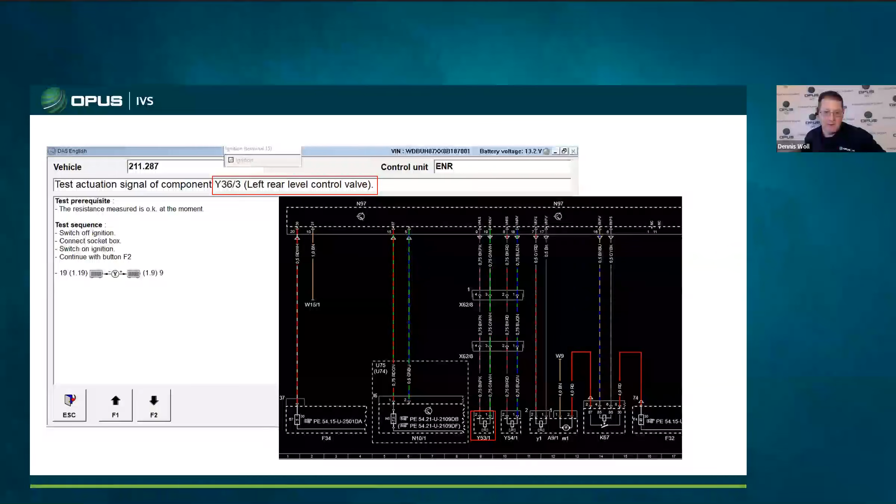Simulation is located on the desktop in the bottom left there. Oh, where is simulation? Here you go. Oh, did I hit the wrong one? Sorry, hold on, there it is. Right there, oh, that's diagnosis. If you go up one, it says sim, S-I-M, over there. That's where your simulation will be. Is that good, Garrett? Can you hear us? I hope you can hear us. Yes, okay good, that's for key, let's go.

Keys can be pre-programmed, yes, I said it earlier, Rich. So FBS4 keys can be, well, as Rich is typing in there, if you order them, again, if it's an FBS4 key, you can't program it, but you can order it all keys lost. If you order it as all keys lost, it will come ready to go. And it's not just like a KEYLESS-GO key, it's FBS4 keys in general that you can get. Typically they are all KEYLESS-GO, but that was said earlier.